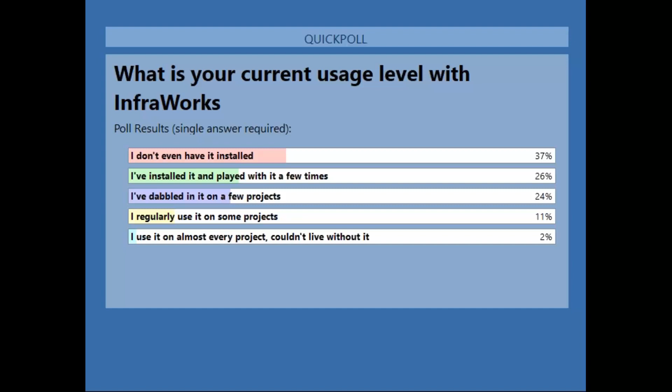So let me hide that and get along our way here. I want to tell you guys about our civil engineering community site. This is a great central hub for all the different stuff that you might care about as far as InfraWorks and Civil 3D and our other products that have to do with civil engineering.

Here you'll find links to the forums, idea stations where you can submit ideas about ways you'd like to see the product improved. Tips and tricks, the gallery where customers like you have submitted projects that they're working on, images, videos, 3D models, even VR. You can even post VR versions of projects that you're working on up in the gallery. Social hub, what are folks talking about with our products as far as Facebook and Twitter and that sort of thing. Also videos, including a full library of the recordings of this webcast series.

Like I said, we've been doing this for over 2 years, twice a month. You do the math. We've got a pretty extensive library of webcasts having to do with InfraWorks, Civil 3D, and even some other products as well. So definitely check that out whenever you get a chance.

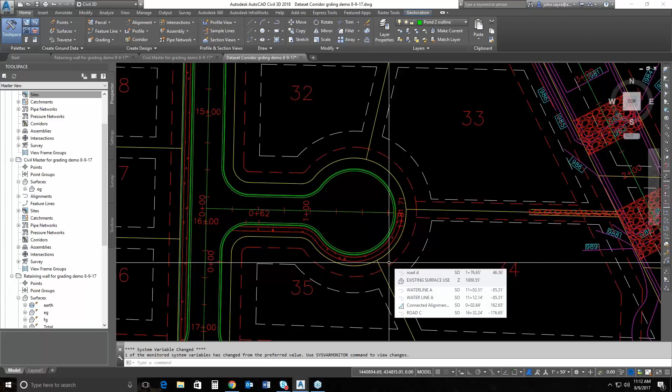And then I'm going to jump over and talk about what we do at the end of a cul-de-sac, or a hammerhead, or a knuckle, or whatever - they've got different names for these everywhere. So we'll talk about that also, because these are typical things that we have to put design on every single day. So we need to address that first, and maybe Eric will have me back and we can do a more advanced class later on, because there's a lot more to talk about than what we're going to be able to go through here today in 45 minutes. So let's get started here.

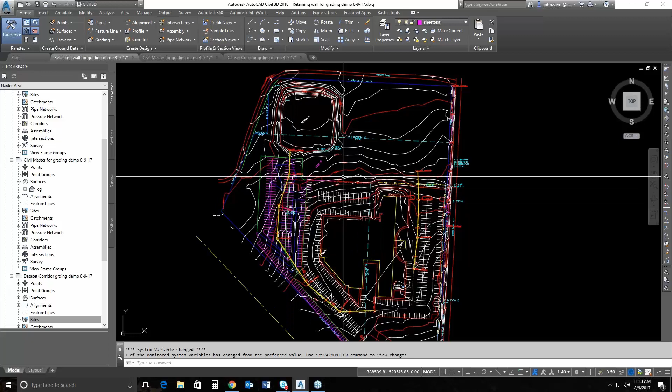So first off, a couple things to remember about the feature line. I'm just going to go up and we're going to start here. There's a couple, 3 different ways that we can build feature lines. We can build them from objects. We can build them just the feature line itself, piece at a time. We can build them from an alignment, all right?

So a use case for building it from an alignment is if you had an alignment and profile that you were designing for an entrance, maybe. So this entrance right here, coming off this road, if you designed that with an alignment and profile, and then you wanted to be able to grade away from it, and you didn't want to build a corridor, you could actually have it generate a feature line from that alignment and profile. And yes, it would stay dynamic to that profile vertically and the alignment.

You can also create feature lines from corridors. This has been something we've been talking about the last 3 releases of Civil 3D. Now you can actually break up the corridor even more. Since 2018 came out, we've got more functionality with that corridor. We could do a grading class just on the corridor itself and using feature lines with that. And here you'll see you can create a feature line from stepped offset. We also have other commands that come up whenever we generate the feature line, and we can actually get to that command there once we generate it.

So let's start from scratch. I told you we were going to keep it simple today. I'm going to go ahead and select create a feature line. So the first thing you see here is you have to put it in a site.

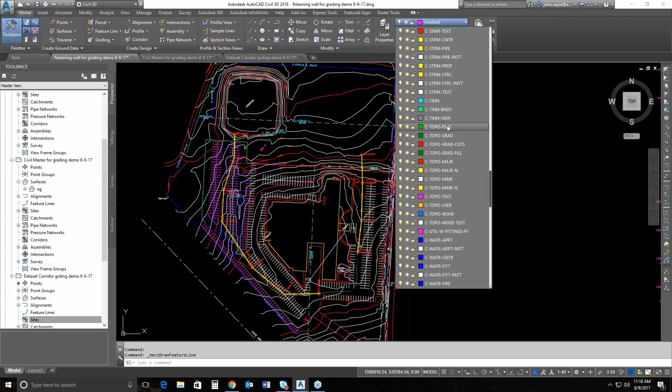So we're going to drop down and we're going to tell it to use the current layer. We're not going to do that. Well, actually, I am going to do that. I always keep everything in that out-of-the-box layer, just because I'm kind of simple that way. So if I go up here and I go to C Topo Feature, that's the layer that we would probably use. So I'll go ahead and I'll hit Create a Feature Line again.

We're going to go ahead and I can put it in a site, or I can actually put it in none. So we'll start out by putting it in none. I'm going to tell it to use the current layer because I've got my layer set. And I may build 30 or 40 of these feature lines to generate a surface. So I want them to be in the same layer so that when I'm done, so that nobody can mess with them, I'm going to turn them off. I'm not going to freeze them. I'm going to turn them off.

So down here under conversion options, I can tell it if I'm creating something from an object, it'll give me the option to erase the existing entity.

I don't recommend erasing that because I always want that entity back. If I erase it and then turn everything off, my parking lot goes away. This is personal preference, but it's just a rule of thumb with me.

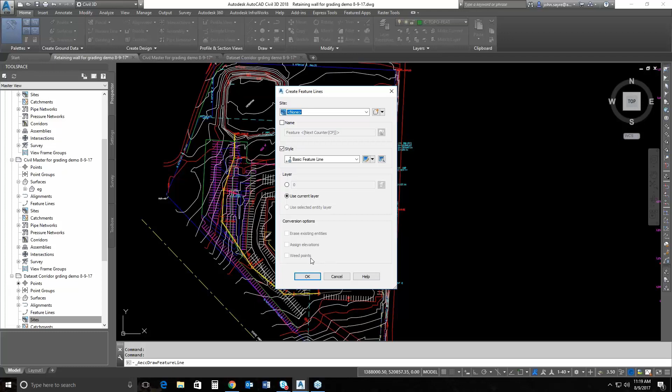So I can select Erase Existing Entities. I can tell it to assign elevations so I don't have to key in every elevation—you're going to see that today. And I can tell it to weed points, so if it's pulling elevations across the surface and I've got tons of points on that feature line, I can tell it to weed those down for me. I'm going to go ahead and hit OK.

I'm just going to start drawing a feature line, the same way you would draw a polyline. If I pick a point, it asks me for an elevation. I don't have to give it one, but I always like to. If I don't know the elevation there on that surface, I can just hit S, and it'll pull that from any surface that I have. I only have EG there, my existing ground, so I'm going to have it pull that elevation.

We also can start to think about relative elevations to a surface. What I mean by that, I'll show you here with a retaining wall: I can tell it if I want it to be a foot higher than that surface, it will pull that feature line up automatically and leave it at whatever elevation I set higher. So it reads the surface, and I tell it I want it a foot higher than that surface—the elevation at each point will be relative to the surface, just a foot higher.

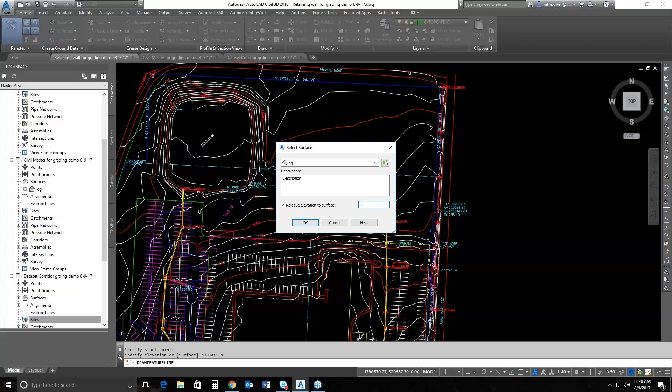Now, what happens when the surface updates? Guess what—the relative elevation automatically updates. So all of that is dynamic and getting updated, and it just makes grading a lot easier. We're going to use this relative information here in a minute.

I'm just going to hit OK to specify the next point. If I pick the next point, you've got some options down here. I can set this point and set the elevation on it by slope—I can say I want to go from this point to this point at a 2% grade, and it'll set the elevation at the end there for me. I can actually give it an elevation too—I can just hit E for elevation and key in the elevation at that point.

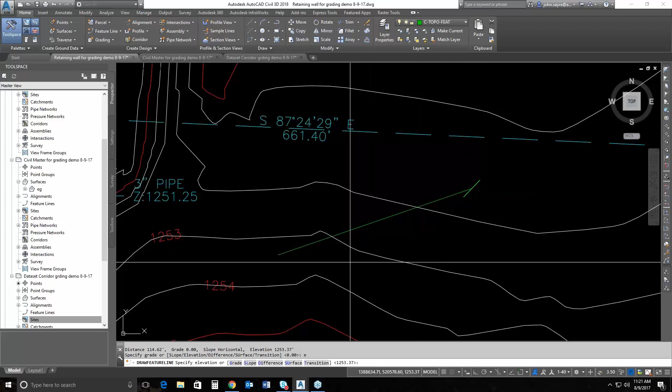You can see here I can give it a difference. What that means is I can say I want you to raise that a half a foot from this elevation that I started at—so it's a difference of, say, 0.5, and it would set the elevation at that point. The one that I think people miss and don't use very much, and it might just be because the other ones work so well, is transition.

I have this feature line ending up on the north side of this property somewhere, and I started here with an elevation. I'm going to tell it I want it to transition. I'll pick my next point, hit enter for transition, pick my next point here, hit enter for transition again, and then come back and set that to a specific elevation.

So I'm going to tell it to pull it from a surface—I'll hit select, pick my surface EG, and it sets that elevation. It wants me to accept it, so I hit enter, and I hit enter. Now, I did not set an elevation here, here, or here.

So let's look at what it did transition-wise. I'm going to select that feature line, right-click, and go down to Elevation Editor—this is a great, great tool. Notice what it did: it set the initial elevation, it set the end elevation, and it interpolated at a consistent grade through to that next point.

Folks, if you're doing curb returns and things of that nature, sometimes feature lines are the way to go. Any kind of transition you're doing for lot grading—hey, it's great to not have to figure the slope from point to point. You just use a feature line, tell it to transition, and it sets that consistent slope for you. We're going to use that today, too, whenever we grade the parking area.

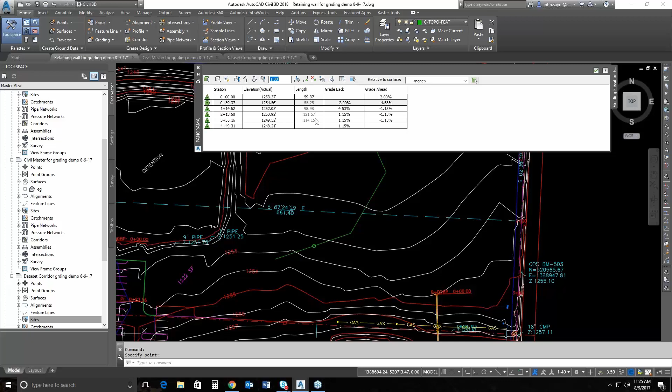So that's about all the time I want to spend on just what the feature line is, how it works, and the editing tools that you have, because we're going to get into this and start talking about it in a real world context.

So I see there's lots of questions there, Eric. I'm going to take 10 seconds here and ask if there's any that you want me to try and answer, or you're taking care of them pretty well, I think. There was one that I wanted to throw out there - can you move feature lines between sites, or can you move it from the none site to a site, or vice versa?

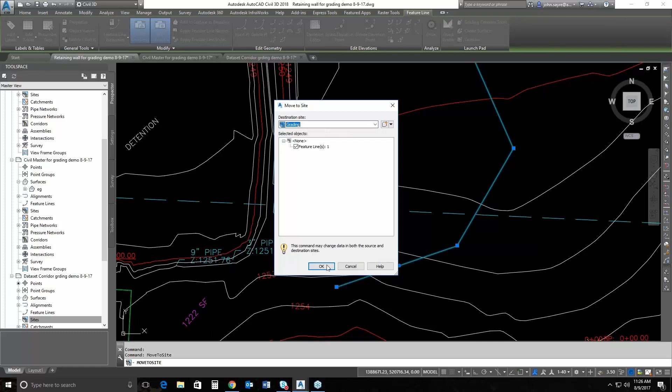Absolutely you can. If I select that feature line, remember I had that in a none site, I can right-click on that feature line and drop down to either move to site or copy to a new site. So I can move it to a site and it tells me the destination site that I have. Remember, I had site 1, which is pretty typical in a lot of people's templates, and I have that grading site. So I can move it to that grading site and hit OK. Now if I run a list on it, instead of being in a none site, you can see that it's in the grading site.

So absolutely you can. Another thing that I showed you is that you can actually copy that to another site. So if you don't want to lose the design that you have on that feature line and you want to try and use it in a different way, or maybe run scenario 2 of your grading, you can copy that to another site, turn off - that way whenever you're using the feature lines, you move them up and down, maybe you end up crossing them, they're not interacting, and you're good to go.

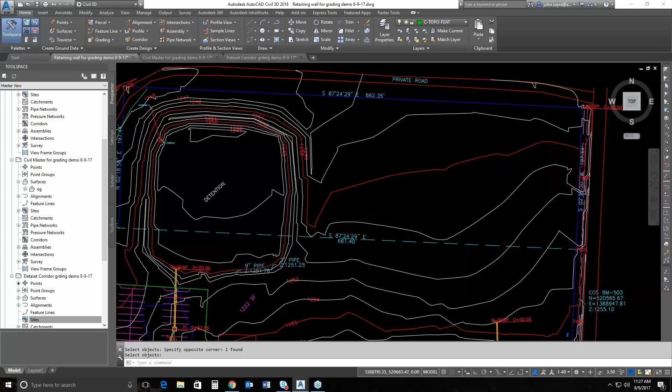All right, I'm going to move on because I've got 33 minutes here, and I told Eric I would end about 2 minutes early, so I've got a lot to do in 33 minutes.

So the first scenario I wanted to talk about is a retaining wall. Folks, I can't tell you how many times I've had a site where I've graded to daylight from a feature line, using the grading tools, and then figured out we're not going to be able to do that - we're going to have to put a retaining wall on here. Well, now inside of Civil 3D, the retaining walls work very well with a corridor, because we've got the corridor bow ties that are fixed. I'm going to show you here in just a second how to fix one.

We've got those, we're able to fix the bow ties in the corridors. It's a great tool, so it makes the design look really tight. And the fact that we can actually build a corridor from a feature line is something folks have been asking for forever. I applaud the product team for doing that, because it gives us a whole lot more leeway here in our design.

So what you see here, there's a finished grade surface on this parking lot, just as a scenario, and I've got a couple of feature lines. This one's representing the back of curb, actually the edge of the asphalt, and I've got a line here that I was referencing and just showing as the curb.

I'm going to offset that a foot, okay? Because at this point I'm just trying to see if I want to use a retaining wall or not. So I would select that feature line, because I don't want to use this one - it's too close for this particular design. So I'll select that, and you can see all the tools you have here for feature lines.

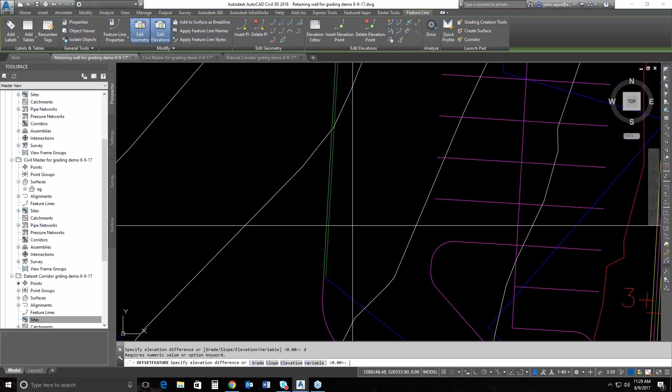If I go up here to edit geometry, folks, you'll live here - this is a great area inside the ribbon. I want to select the offset command, create a feature line from stepped offset. So I'm going to go a distance of 1 foot to this side, and do a difference of 0. That gave me a feature line that's a foot away from the other one, and you can see it goes up, comes around, and ties back in over here. Now I want to create a corridor from that feature line.

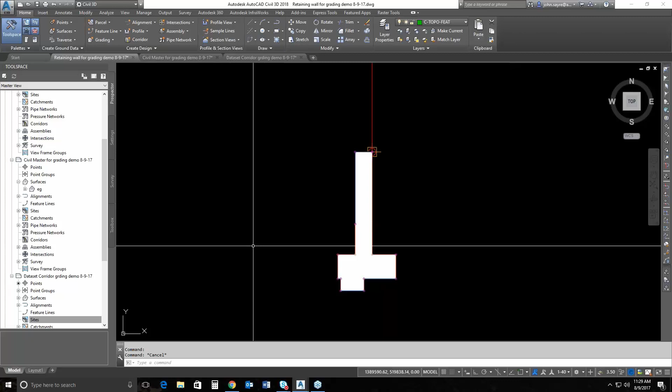Now I have an assembly out here, and it's just an assembly with a retaining wall subassembly on it. So I'm going to go up to corridor and give it a name - we'll call it retaining wall, if I can spell. I'm just going to leave it a basic style, we're not worried about look and feel today.

I'm going to go ahead and select feature line, and I don't know if that feature line's been named, I don't know what site it's in, I don't know anything about it. I know I just offset it, so I don't want to have to hunt for it. So I'll select my select-from-drawing button, and I'll be able to just pick that feature line.

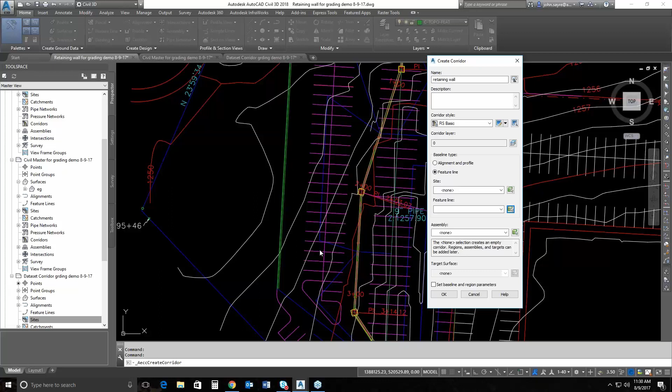Now it's going to ask me to name it, all right? It just keeps it straight, helps with the corridor, and helps you name these things. So we'll call it - something after we click in there - retaining wall. I'll hit OK, and the corridor dialog box will come back up.

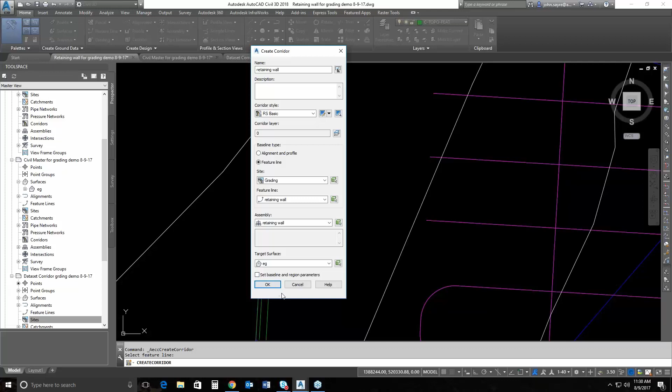Now I need to give it an assembly to run down that feature line, so we'll use our retaining wall assembly, and I want it to daylight to my EG surface. I'm just going to take off set baseline and region parameters - I don't need to do that at this juncture, it's going to set it up automatically. I hit OK, and voila, we have our elevation, or our retaining wall.

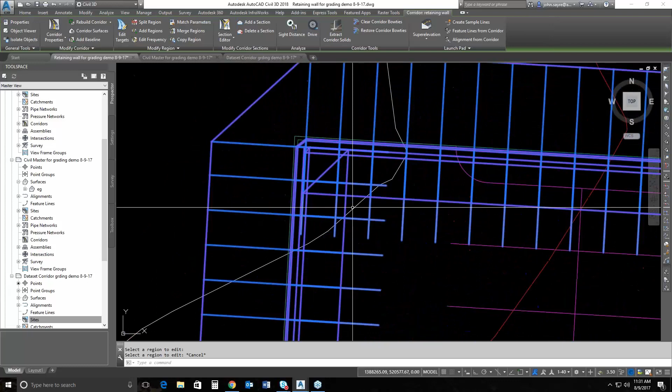Now something I am going to do real quick is set up the frequency on this retaining wall. So I'm going to edit my frequency in here, and tell it I want it to be 5 foot along tangents, and I don't have any curves. I hit OK, and it tightens up my frequency. Notice that we do have the bow ties, and I'll take care of those in just a second.

But what I want you to see is that now that is daylighting to something that it shouldn't be. So let's look at that real quick - I told you there would be things that we missed.

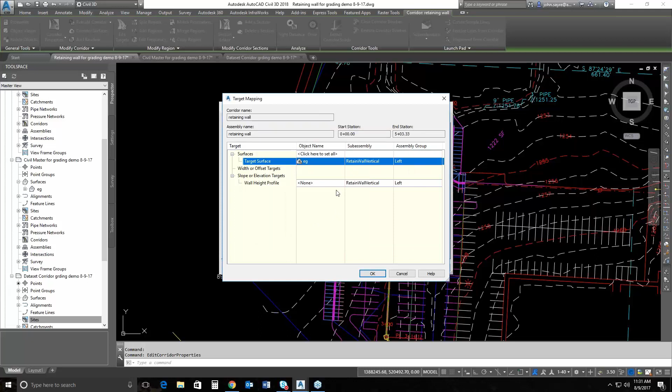So let me select that, and I will go to the corridor properties, and we'll make sure it's set up and targeting the way it should be. EG is the left - that should be correct. And slope or elevation, that's going to be the height of the wall or the actual top of the wall. I can control that differently.

Let's rebuild it and see what happens. Maybe look at the feature line. Aha! See that? That's a problem when your feature line is set to 0.

So I can quickly re-offset that feature line. All right, I did something different - so the offset distance is a foot, I pick the side, and I want to do a difference, so the elevation difference is 0. All right, reset it, and let's look at it again.

The elevation editor. Grab it, go to elevation editor, and it still has zeros. Let's look at the original. Yep, that's a good reason why that's not working. So let's do this.

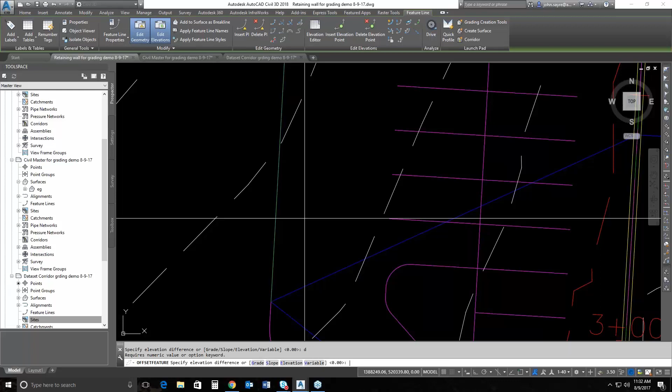Let's grab that feature line, and it has elevations on it. We'll just do an offset real quick. We could do it for the curve, or we could do it for the retaining wall. We'll go 1.5 foot. I'm going to specify this side, and do a difference of 0. There's our feature line, and it does have elevation, so we are golden now.

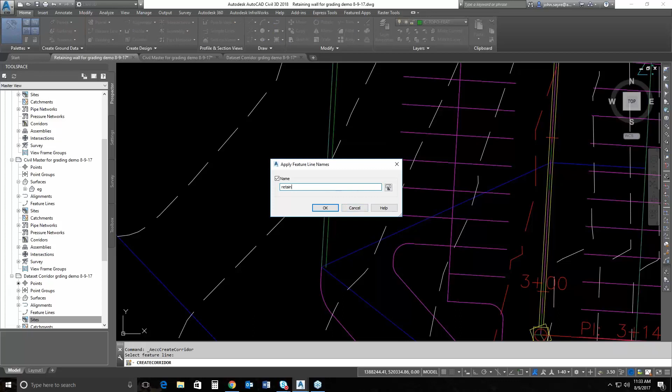So very quickly, I'm going to go back and recreate this corridor. We'll do it from a feature line, and I will select that feature line again. And I'll pick it, and I'll call it retain. Hit OK. And we'll run that same assembly, and I bet you we get a little bit better product this time. Yep, I can tell right now that it's a lot better.

I will go ahead and turn it on its side here so that you can see what it's done. So I can see that retaining wall, and I can see that it's following, getting taller as it goes.

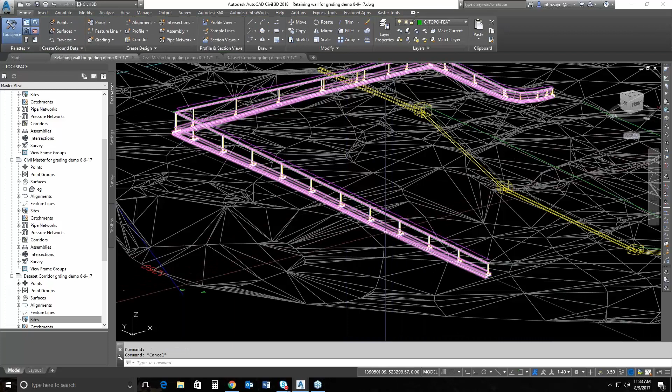So what can we do here? I'm going to grab that corridor, and we'll again modify the region. So I'm going to edit the frequencies and pick inside of it. I'm in a 3D view, so it's going to be hard to do.

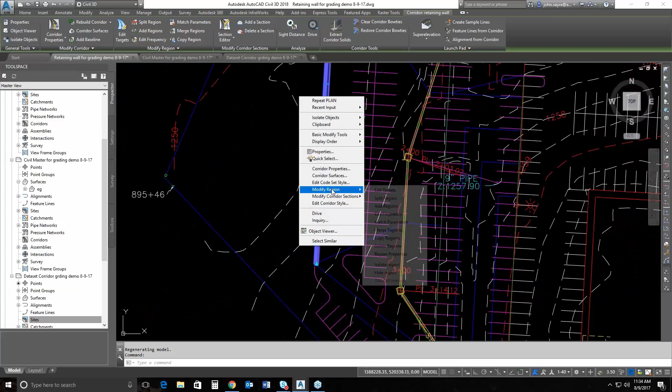So let's get back to something that we can look at here. I'm going to go back to my frequencies, edit frequency, pick, and say that it's... not 1 foot, 5 foot, and hit OK. Now the frequencies are better, and I can see that it adds those in right there.

Now, why would I use it? Well, number one, the feature line is setting and controlling this retaining wall, which makes it a little bit easier than trying to use an alignment and profile, because we can grip edit any of that feature line and edit that back and forth, move it, whatever, and the corridor will follow.

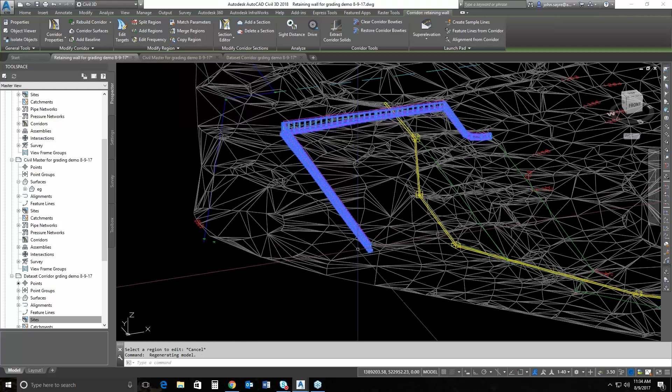What I want to show you is that this can be, it's actually attached there at the surface itself. So I can grab that feature line now. In a 3D view, it's going to be just a little bit difficult. I'm going to send that to the back. Then I can grab that feature line it's generated from.

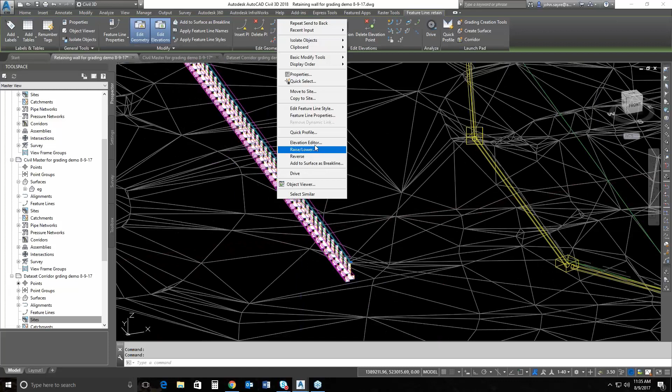I can right-click on that, and look at it inside of my elevation editor. Now I want the top of the retaining wall to be a foot higher than my finished grade surface. So what I need to do right out of the gate is tell it I want it to be relative to my FG surface.

You get another column here of elevation relative. This is the elevation that it's going to be moving up. You also get a column that says elevation derived from - this is an absolute elevation. We want to select all of this and tell it to be relative to a surface, and give it how high it's relative. So I can select all of the stations and tell it I want it to be a foot higher, and notice that top of wall came up.

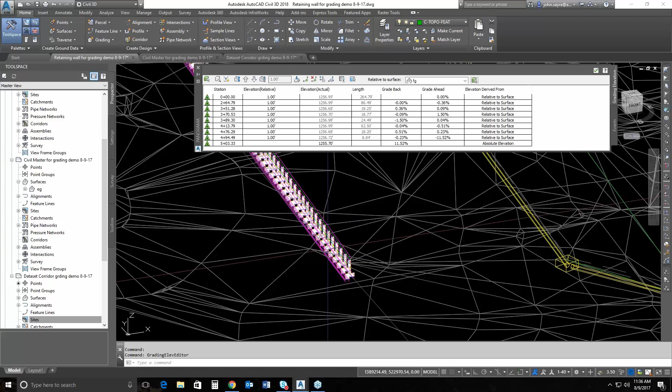Now, how can I prove that? Well, I can simply change to conceptual here, and you can see that the retaining wall is now higher, a foot higher than my surface, right?

So if I want to change that again, I can grab - I'm probably going to have to send this to the back again. I can grab that feature line, and go back into my elevation editor, and say, you know what, number one, I can change these individually. I don't have to make it relative at each point.

So at that particular juncture right there, or point, let's see where we're at on the wall. Let's go back here. That should be this elevation here. I can actually make it relative 2 feet. And notice it comes up automatically.

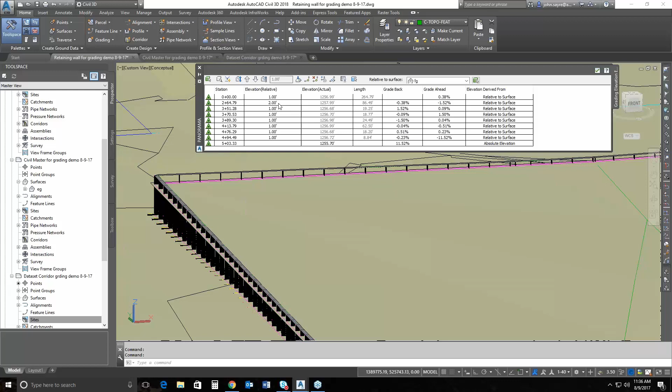I can go back to 1. Notice it's adjusting that wall up and down. Let me turn off this view. Let me go back to 2D wireframe. Watch your footings here - if I make that 2, it's adjusting the footing width also. I can make it 3. It's moving it up and down.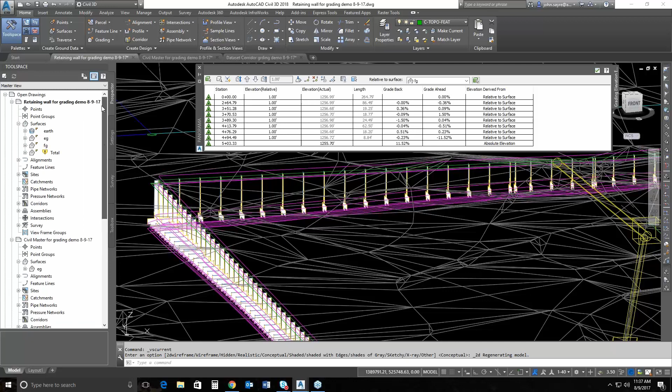We'd have to rebuild the corridor in order for it to read daylight. But once that's done, we could actually tell it right here that we want the corridor to be rebuilt automatically, or we can hit the wrong button there. Hold on just a second. Let's go back.

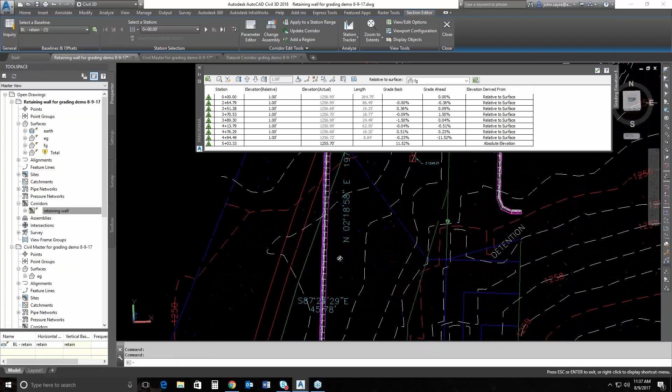Don't get into your corridor editor because it makes several viewports. Instead, set this to rebuild automatic, and that footing will stay pinned and adjust. Let me go back to it, and we'll make that 2 feet, and notice the footing stays.

They get wider according to the height, and we're still relative at that point. I can't tell you how many times I've generated a corridor or a retaining wall and had to adjust the top point on the retaining wall - it was a booger because I had to set the top width with feature lines and then set the bottom, and it was a mind scramble to keep in check. This makes it very, very easy.

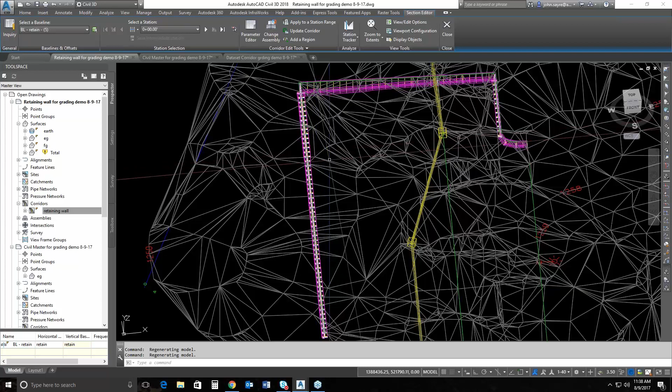Let me go back to the plan view. We're going to select the corridor itself and get rid of this bow tie - I can clear a corridor bow tie. So I can pick here, the incoming and outgoing tangents, and tell it I want to fix it here, and notice it resolves that bow tie.

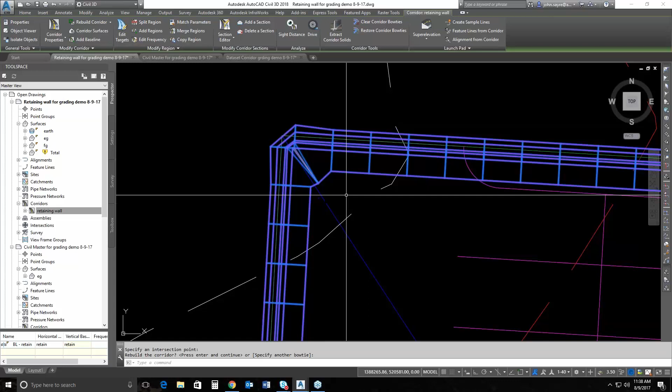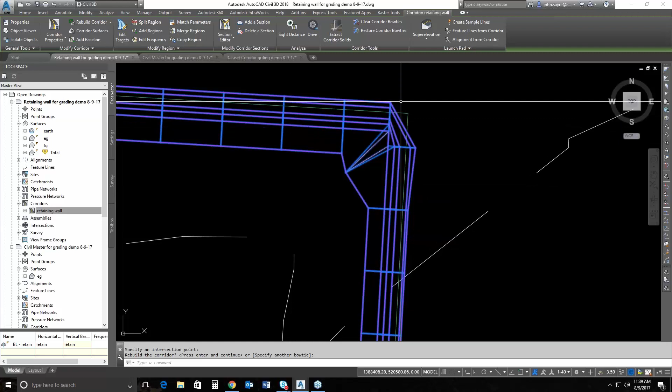We can do the same thing here. You may need to adjust your frequencies just a little bit, but we'll go ahead and clear that bow tie here. And I'm going to make that come out just a little bit more, and it clears it. So we'd give it some adjustment on the frequencies, maybe break it down to 2-foot increments, and it would come around this exactly the way we want.

So being able to clear the bow ties - great thing. Being able to build a retaining wall with a feature line and then generate the corridor from it - fantastic. It's just a good tool.

Now, I said it was relative to the surface. So if I was to take this and put this up here so you can see it, and then I just grab - let me rebuild this. What I'll do is add an elevation to the FG surface, the entire surface.

I'll go down to edits and say I want to raise that surface. Let's raise it 0.33. Notice that the retaining wall elevation moved up - the whole surface moved up 4 inches, but it also took into account the top of the retaining wall.

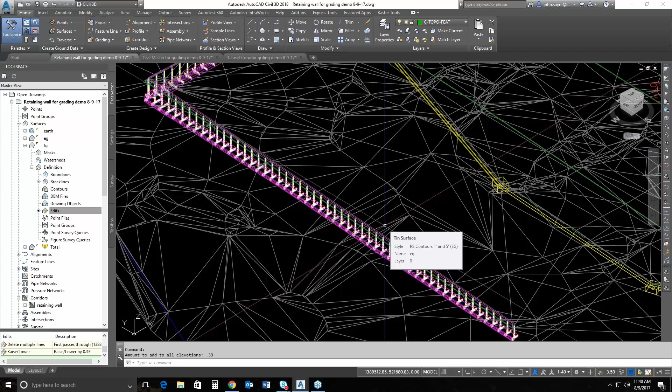So it's updating your cross-section sheets. If you've got cross-sections of the retaining wall, it's updating all of that at one time. Really great way to use the feature lines. Obviously you want to be sure this pipe is underneath the retaining wall, but we take that into account later. That's just one real-world feature of being able to use those.

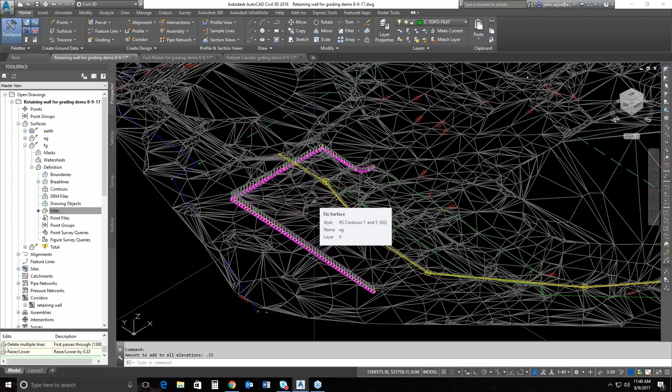I'm going to go ahead and jump to my next item here. Got a couple of questions I'd like to throw at you, John, while you're switching.

Sure. One question was, can you move multiple feature lines from site to site, or can it only be done one at a time? No, you can select as many as you want and move them.

And can you - so clearing the bow ties is obviously a corridor application, but is there one for grading objects as well, or does that handle itself? No, there's not one for grading objects. The grading object itself has been enhanced, so it's much better on the bow tie situation in 2018. It's actually gotten better even in 2017. So it does its own bow tie fixing.

Right, that's what I was thinking. I think that yeah, it does. And I think there are some scenarios where it might still leave a bow tie, but I'd say probably 90% of what's out there it does fix. Now, if you have two grading objects that run into each other, it will fix that now. Used to they would just overlap and look all wonky. Well, now they'll actually interact - if they're in the same site, they will interact and try to grade together.

So that's a pretty big deal. We got some additional information coming in on moving feature lines. It appears that maybe you can only move feature lines from one site to another if they all exist on the same site to begin with. So if you had 3 different feature lines on 3 different sites, you couldn't move them to one common site apparently.

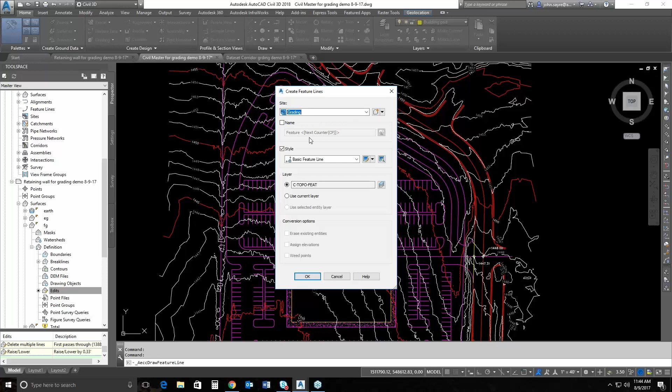We're going to put this in the grading site because I'm going to bring all this together. So we're good to go here. I'll select my starting point - I'm going to start right here and pull that from the surface, from EG, that's existing. Then I'll snap to this point at the edge of pavement and pull that from the surface also, because we're not going to tear that cross slope out.

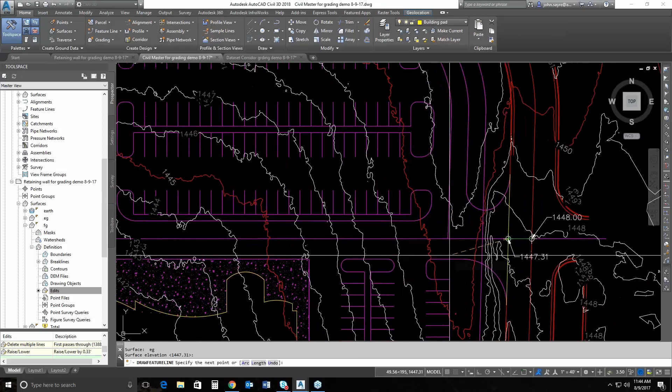Now I'm going to set some intermediate points and kind of do this by grade, using the transition command to see how I'm laying it out. I'll snap right here and use transition, then come across and stop around where the building pad would be. I'll set a point there and say transition, but we're gonna go back and reset that. Come to here, set a point for transition, then set a point here at the end, and we'll say transition.

It's going to ask me for an elevation. I'm going to give it an elevation - let's just go ahead and give it the surface elevation at that point.

From there I kind of know what elevation I want to set my pad at just by looking, so I can do this arbitrarily. I can set that there - we're still meeting all the grading requirements of being under 5% for this job. I'll set this elevation on this side the same, so I'm kind of flat across there in the beginning. Then going up from this point, we'll go up 1% and set that elevation at that point. So I have my control going across. Now, one thing I did not do was set a point here.

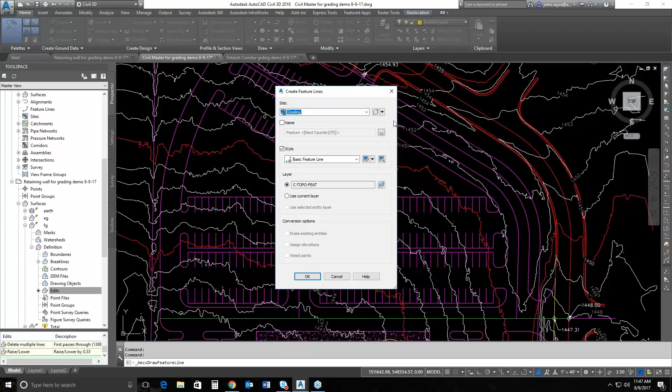I'm good to go. Now I'm going to set the control coming in from the north down and tying in here. You'll see why I'm doing this in just a second. So I'm going to go ahead and create a feature line, and same thing, it's going to be in grading. I'll hit OK, and I'm going to start here at this end because I know the elevation, 1444.

Now I'm going to follow this line, and we're going to just use a transition. Now I can also have it follow an arc, so I can hit A, and I can have it follow an arc around that center line, and tell it to transition, then go back to adding a line. I'll select a point here and do a transition, and then set a point here, and that's the end of where it's going to figure the transition.

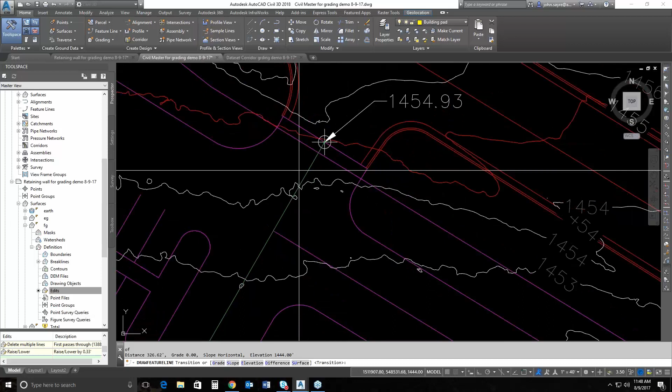So I can tell it I want to pull that from a surface if I don't have my label there. I'm done. So let's look at what it did. I can go into the elevation editor, and you can see that I'm at a constant slope of negative 3.35. That's plenty good for what I want to do. That's definitely within requirements.

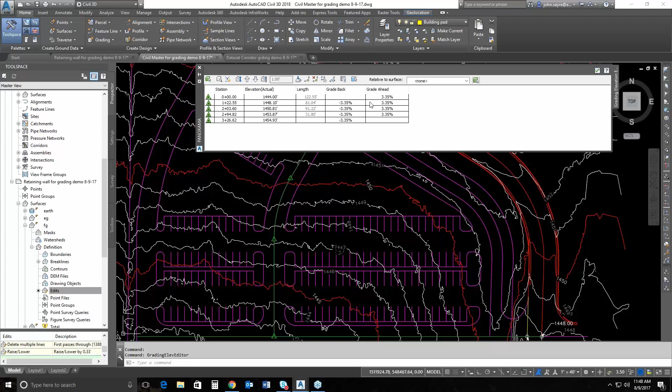If you don't like that, then you can start to tweak these up and down and retransition those in between. I say retransition, you'd have to do it here in this panorama. Now, so I've got my control this way, so everything down here I can grade from this.

So what I'm going to do is grab that feature line, and do what's called a stepped offset. I'm going to grab this selection here in the ribbon. Once I select my feature line, let me show you that again—you get these commands for the feature lines. So I'm going to hit create a stepped offset. It's asking me for a distance.

Well, I don't know what the distance is from here to back beyond this parking area. So I'm just going to pick right here, and pull it down and set a point there. It pulls the distance for me. I'll pick this side, and what I want to do is grade away from that feature line down. You know what? I picked the wrong point. I'm going to do this again.

I'm going to grade away down to a point here at the back of the building because I want to set that first. Let's go a distance from here to, say, here, and we'll pick this side, and I'm going to grade that direction at negative 0.5. So we'll just drop it 0.5% to that point, and it sets all of the elevations on this feature line according to this elevation at 0.5% lower.

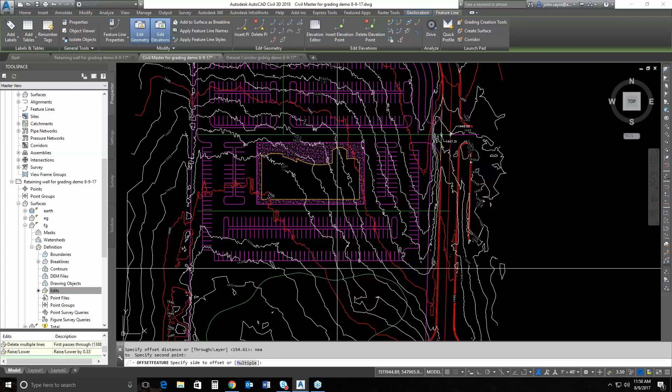So let's do that again. Let's grab this feature line. I want to go 1% down because there's a pond down here, it's going to collect all the water. So I'll hit select stepped offset, and go from a distance of that feature line straight down to, say, here. I'll pick this side, and grade at a negative 1. I want it to go down at 1%. So I set that line. I'm good to go.

Everybody's like, well, there's only 3 or 4 feature lines, what do you mean you're good to go? I'm almost done, and I'm almost ready to show you how we can put this together.

So this particular feature line here, I want to grade this back this direction, say at 0.75%, so that all of this is flowing back to this road, or flowing in this direction in some way, shape, or form. Because I can start to put inlets in after I've got it graded, things of that nature, to start to catch this water.

So if I grab that feature line right there and I want to do an offset, I can say I want to do an offset from here to, say, it doesn't matter—I can do it all the way out here. And I can say I want to go up at a grade of 0.75. If you want to go up, it's a positive. If you want to go down, it's a negative.

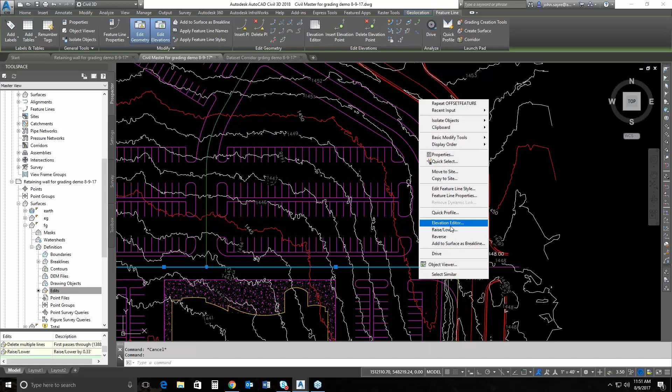So I set that out there to the left. Now, in order to get a surface over here, I need to set elevation on this line. I can go back and reference this elevation point right here just by clicking through and looking.

So this particular elevation is 1446.80. Now, we could snap to that, and you might get the elevation, you might not. I always just go back and set it. It's very easy to set. Plus, it keeps me in tune with how I'm grading.

So I'm going to get the elevation on the other end, and guess what? We're going to do a transition between them. So let me pull this down. So that's the end of the line, and it's 1454.93. All right, so that's going to be our beginning and ending elevation.

So let's throw another feature line on real quick. Let's go to feature line, create a feature line, hit OK. We'll start here, and we're going to input the elevation at 1446.80. All right, we're going to go to this endpoint here.

And we're going to use a transition. Then we're going to go around this arc here to that point. Oh, I picked the wrong one. When you do that, just hit enter and then hit undo, and it'll go back to the previous point. So I'm going to go ahead and select the right point this time.

We'll do a transition, and I'm going to go back to using a line, and we'll snap to this line. And we'll go ahead and set that elevation. And that elevation was 1454.93.

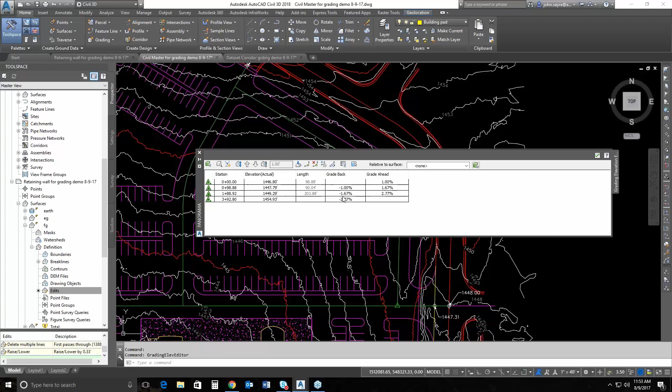If I don't like that, I can come back here and set that at, say, 1%, and you can see how that grade adjusts. So I can tweak it just a little bit if it did something that I didn't like. So we'll leave it at that. That's a pretty good grade we did.

Let me look at that one more time. Elevation editor, go down at 1%. Yeah, that's fine, that's fine.

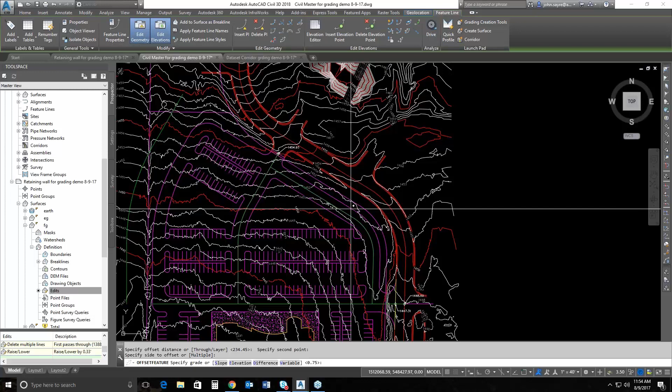Now, I need to get a surface on this side, so I'm going to go ahead and grab that, and I'm going to offset that. I'm going to go from here and just set a point out here, and I'll pick the side it's going to offset to, and we will do a grade again, and we'll just go down at 1%, and it sets that line.

Now, very quickly—I don't know, we've been working on this for maybe 5, 6, 7 minutes, and that's even with making a few mistakes. I can create a surface now out of these feature lines. So if I look at this, we may have to adjust a couple things once we create this surface.

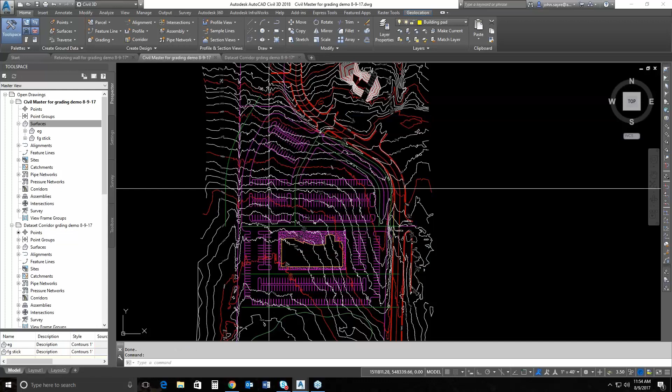But I can say this is going to be my FG, I'll call it FG stick. And I'll grab that feature line, and we can right-click and hit select similar, and it'll grab all of them. Now, it grabbed my pond, so I can hold my shift key down and select it again, and it'll deselect that feature line. So always remember that.

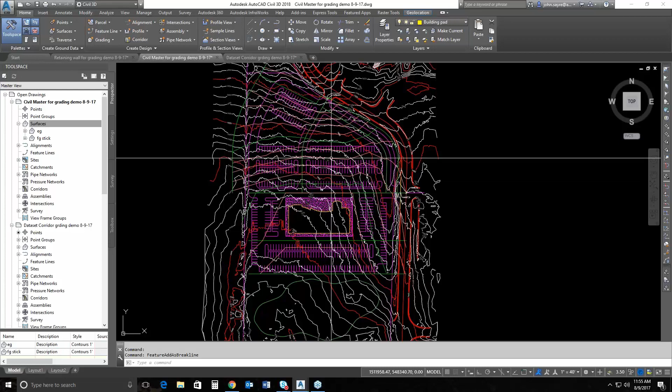I'm going to right click, and I'm going to go to add to surface as a break line. I'll pick my FG stick surface and just hit OK, and I have my slope. All right, you can see—I'll turn off my existing ground surface so that you can see it a little better.

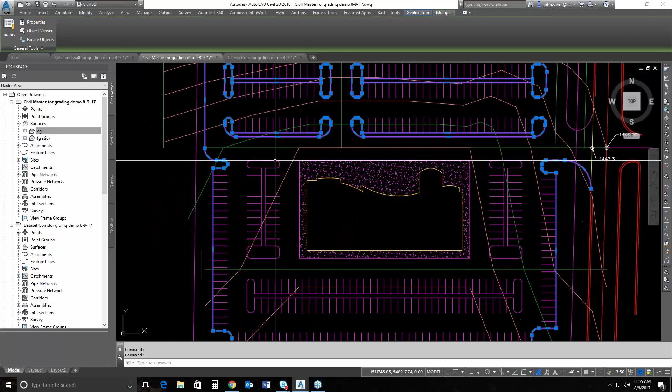And I have a surface that I can grab now, and it covers everything. So when I say covers everything, I can grab that line right there. I can grab this—these are my islands, all right? I can just go in, grab all of these. I can grab that line. I can grab this. It's a lot of fun setting these elevations on these islands, right? Lots of fun.

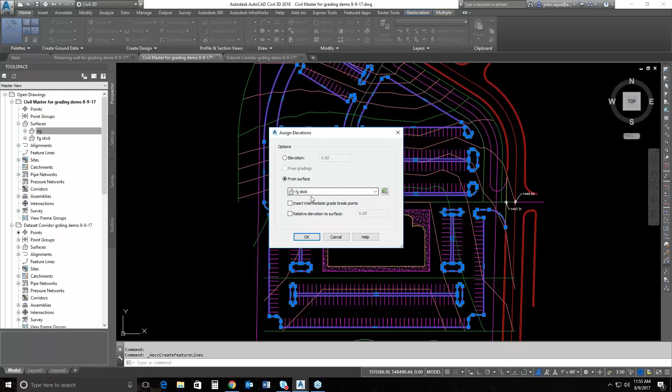So I can grab that, and I can go back to feature line and say I want to create a feature line from objects. It's going to go in the default layer. I'm going to have it assign elevations on all of that from my FG stick surface—that's the surface I just generated. All of those are set, okay?

Now, let's see if we missed one. I'm going to select similar, and I'll just grab them all. I'm going to go ahead and go to my object viewer and just take a look, and it looks like I got them all.

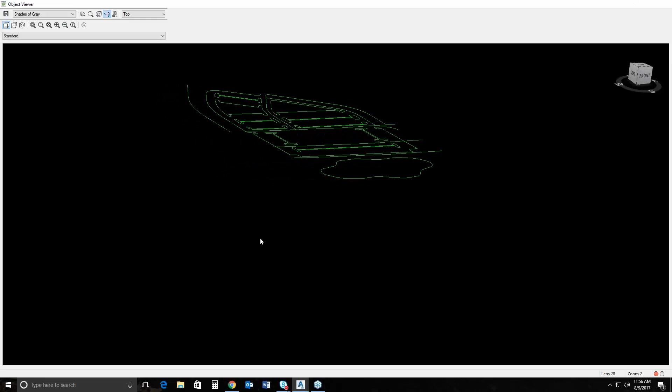So it's all set up that fast. All right, now what about the islands?

This is not the surface that I want to use for everything. I want to use the surface that I just generated from all these islands and everything.

So I can physically just erase that FG stick surface, and I can get rid of these feature lines. The feature lines I used for control, I can grab them and get rid of them. I'm going to leave this one because I want to use it since these were hard control.

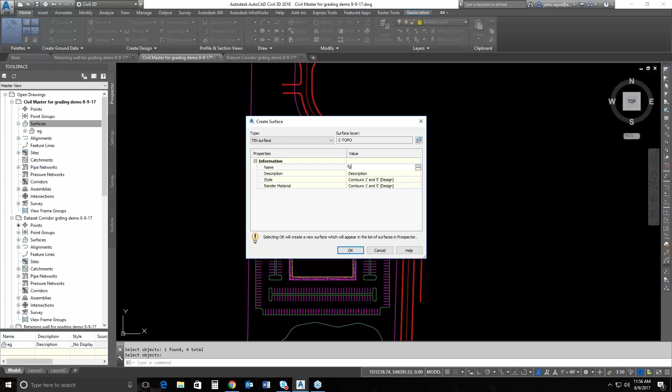Now I'm going to generate a brand new surface because we can do that. Just call it FG, hit OK, and then I'm going to grab all of these by selecting one and hitting select similar, then deselecting the pond, and add those to that FG surface as break lines, and now I have a surface inside.

Now that represents my parking, but it's not taking into account for these particular areas here where the islands are. So I'm going to go ahead and select one of these and do an offset.

I'm going to offset this whatever — I've seen people use a half a foot, I've seen people use a foot. We're just going to use a half a foot for today. And I'm going to pick inside, and I want a difference of 0.5. It's going to raise that particular feature line, so now I have an island.

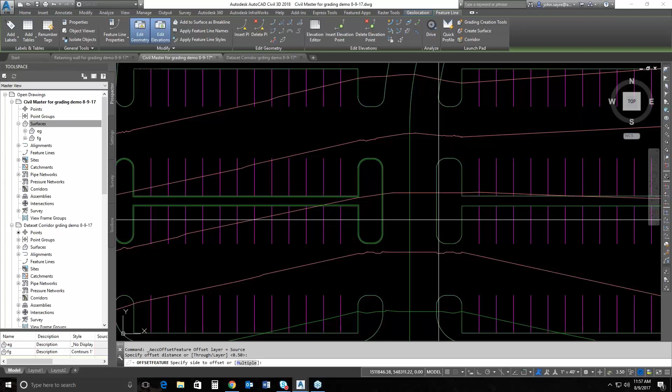I can do the same thing for these. I can pick the distance of 0.5, pick inside. Actually, instead of doing these one at a time, I can grab that feature line, go back to stepped offset, and say I want to go up 0.5, and do multiple feature lines.

So I'm going to pick the offset side, and I may have just led you astray — we're only going to have the one. So I'll just do an elevation difference of 0.5. Let's see what it does here. Elevation difference of... I was thinking of something different.

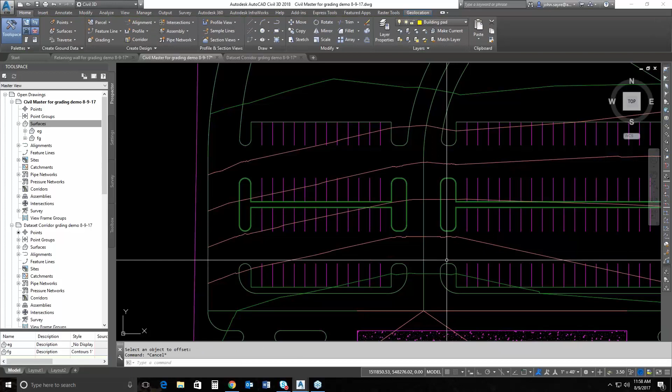So we would have to actually offset these one at a time. I'll go with distance, pick the offset side and a half a foot, select this island — same thing, half a foot, pick inside of the island and do a difference of half a foot. Let's do one big one here, and then we're going to add those to the surface so you can see it. So a half a foot, pick inside.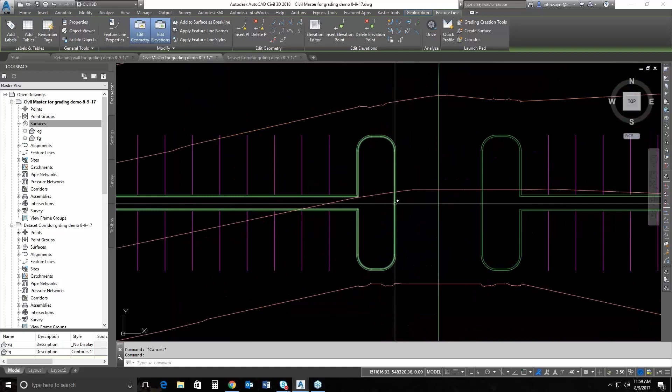Now let's add those that we just offset to the inside to our surface. I've got this one here too, so we'll be able to see this in 3D. I'm going to add that to the surface as a break line, hit OK and OK.

And now you can see the contours themselves actually look different — they take into account for that step. So if I look at this, I can actually see my islands that I've set, and I can see the ones that I haven't, or I can't see the ones that I haven't.

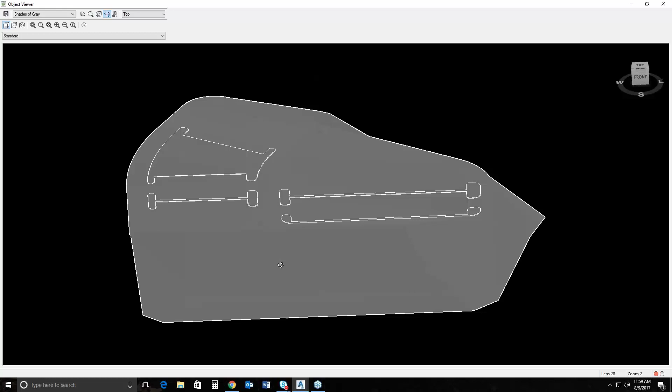So again, I have a line on the outside that I can grab and use a grading object to daylight from. I can also use the daylighting tools on this pond.

Now just for sake of time, Eric, we may go a couple minutes over here. I'm going to grade this pond real quick because I want to show that stage storage chart. But very quickly, we're able to get a grading plan with our design intent from just a couple, 3 or 4, maybe 5 feature lines, and then start to stick the islands to them so the grading looks correct — so the design engineer doesn't go, well, why doesn't that look like it's going through the island and this and that.

It's very, very quick to do. You can almost do it right in front of them, and then they can make design changes right there with you. That's what ends up happening — they see how fast it is, they say, well, maybe that's not where I want to be, I want to raise that. Can you do that? Absolutely. So it makes that very, very quick.

So one last thing — I want to grade the inside of this pond, and I want to show you how to pull a stage storage chart, because the stage storage chart is something that engineers use all the time for detention design. If I go up to grading and go to grading creation tools, I'm going to create a new group, and I'm going to call this pond.

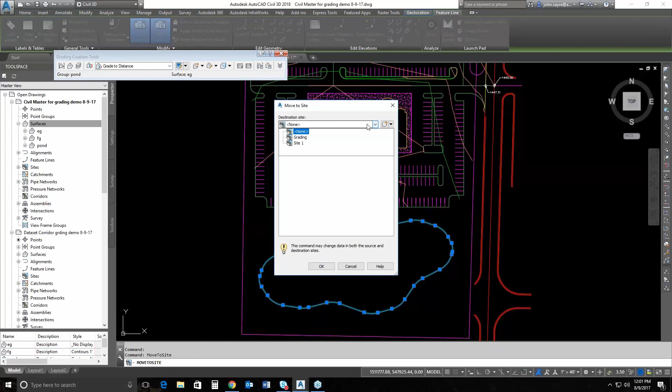So I'm going to go grade to a distance, and I'll say I want to create grading. Pick here - it's not in the group. This is something that happens, you forget which group this is in. So here's where we can move this site, or move to site. Say I want to go to site 1, hit OK, and now when we hit this, we should be able to grade to it.

I'll select inside, I want to go the whole length. The distance that I want to go, let's just say 4 feet deep. And I want to go at a slope of, say, 3 to 1. Hit escape, and I've got my grading down.

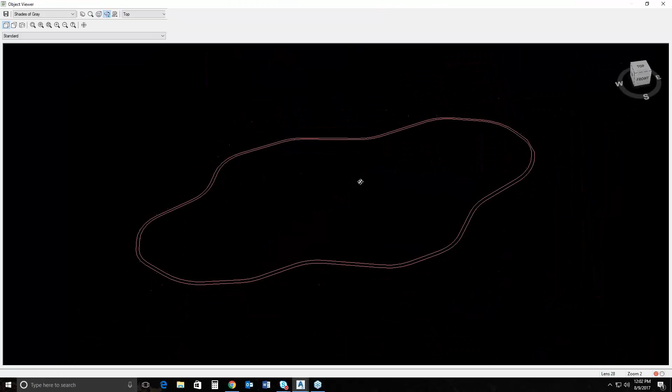Now let's look and see. Let's go to Object Viewer, and that may have graded that up instead of down. So you got to say negative 3 to 1.

So we can edit that right here and say the same distance. Let's go 5 so you can see a change, and do a slope of negative 3, and that will be inside. Then we want to give it an infill, pick the inside.

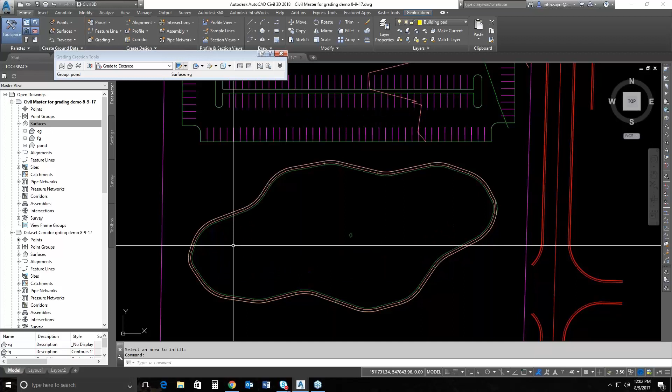We're good to go. Now I don't see any contours. So I make sure that my pond was generated. And then I can go back to the surface properties, and for some reason I've got my contours - oh, there's just not that many contours.

Let's do this, let's make the depth of that pond. Let's specify a distance - that's only 5 feet, so it's not really that far. If I want it to be 4 feet deep, I need to go 12 feet. So let's go 12 and 3 to 1, and now that gives me the right number.

So I just want to pull - I want to know what the volume of that pond is. So if I go up to Analyze and I select Stage Storage, it allows me to define this space, and I can define it from an entity, or I can actually manually enter contours. But I'm going to define it from surface contours, and I just pick that right there, and here's my volumes.

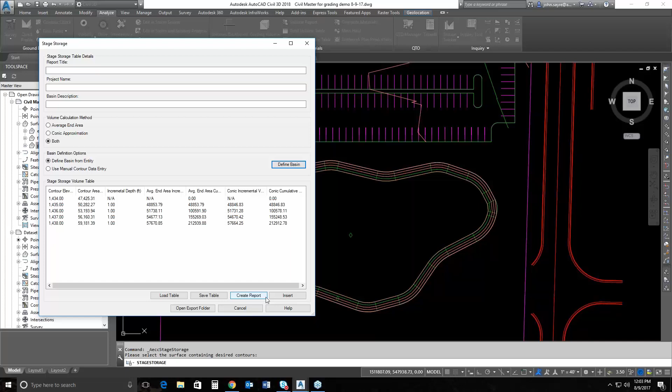Now why is this a big deal? Because anybody designing stormwater, it's so fast to generate that we can get the volume. Well, now if we don't have the right volume that we need, and we need to adjust that pond, we could actually insert this here, then hit cancel, and it would insert my table.

And if that pond needed to grow, I can physically go in here, and I have to send this to the back. I can grab that feature line, and I can start to move this, okay? So I can make it bigger, right? Okay, so it's all regenerated. I got that a little bit bigger.

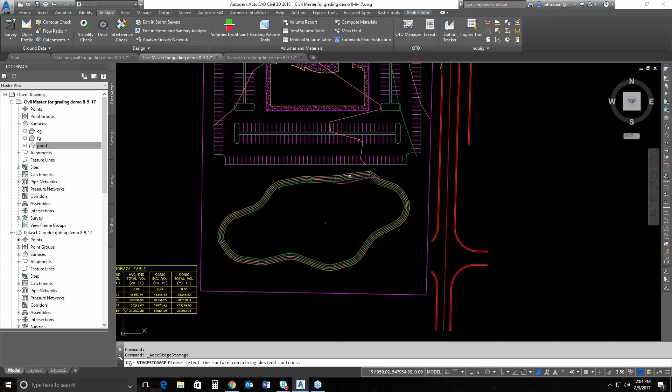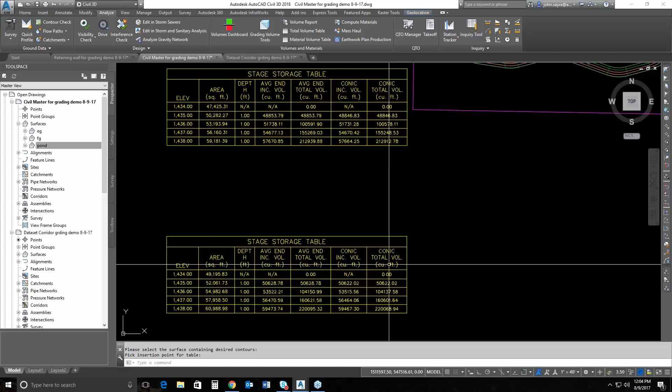I can go back, pull my stage storage chart again, and hit define, select the contours, and here's my new stage storage chart, and I can insert that right here, and you can see that the volumes are different - 48,846, and 50,622. You can see that these are different. That is super fast compared to somebody just listing contours and getting areas and then averaging between all of that. Super fast tool to use to gather information about those detention ponds.

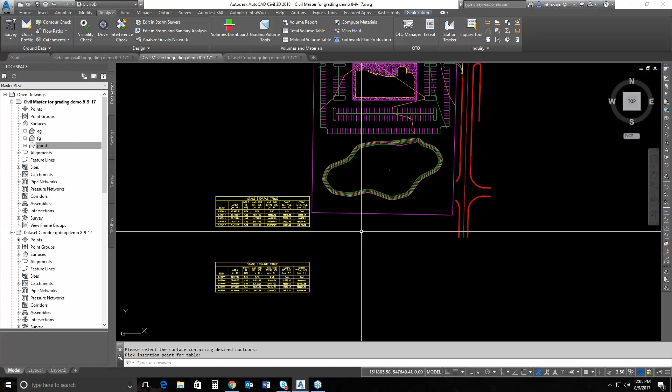I do have one question that came up quite a few times - we've got some very smart and experienced graders on the call, so they were wondering why in some cases you used feature lines when you could have used grading objects and maybe corridors. I know that it's preference, and grading is as much an art as a science. But in your case, when you were offsetting across the parking lot, why did you use the offset there and not the grading object, for example?

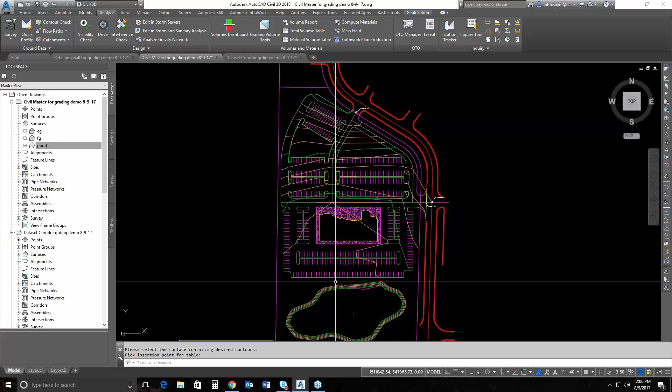I didn't set an elevation at all for any of that grading. I started with what was existing at the edge of pavement, or where I was tying in at those two entrances, and used design slopes to generate the feature lines, building the minimum amount of feature lines so I could offset and set grade from them. That's a quicker way, in my opinion, than trying to figure out how to generate this with a corridor. That's why I use feature lines here.

I find you get more design functionality with the feature line, so I can adjust any of these feature lines at any point and it updates my model. That's why I like to use the feature lines.

It all comes down to getting out of your comfort zone, I guess, since you're used to doing it one way. Is one way better than another? That's personal preference. I like to use the feature lines for the reasons I just mentioned.

I can control this, this was control coming in, and this was control coming in. So once these two lines were set, it's just a matter of offsetting them to get a consistent slope across this parking here and here, relative to my control lines. I was just concerned with getting the water from this point down to the pond.

There are other design considerations on sites that you have to take into account. Will this work for every single one? Maybe, maybe not, but it'll work for a lot of them because it's how I grade things.

If I've got a data set that I'm building, it's a lot easier to offset and generate like a plane surface, then tell this feature line to stick to that particular surface, because the surface represents how I want it to slope. That's why I do it, I can set those very, very quickly. Did that answer the question?